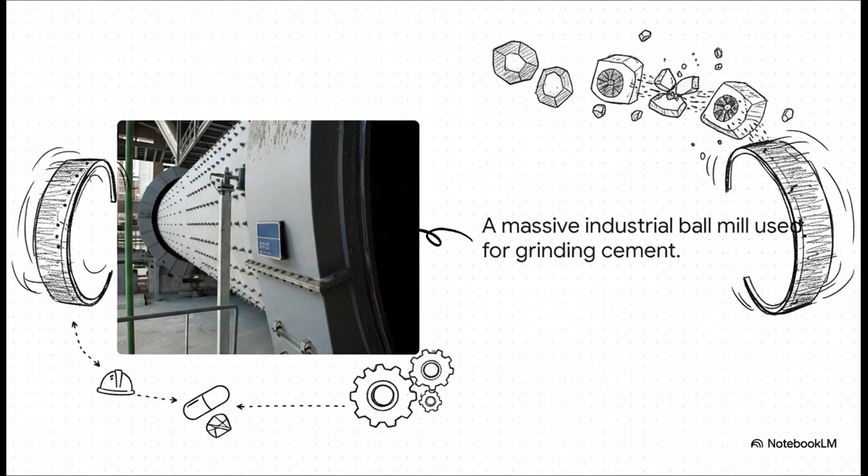I mean, just look at the size of this thing. These huge, rotating drums are the absolute workhorses of so many industries, from mining all the way to pharmaceuticals. At the end of the day, they're basically giant high-tech grinders. So what exactly is going on in there? Let's dive in and find out how this machine, which looks pretty simple on the outside, is actually a cornerstone of industry. It's capable of everything from just crushing rock to literally crafting the building blocks of nanotechnology.

To really get what a ball mill is all about, we gotta look past that massive steel shell and see the pretty elegant physics at play inside. It's this amazing mix of raw power and really precise science. At its heart, the idea is incredibly simple. You take a big drum, you put your material inside with a bunch of heavy balls made of steel or ceramic, and then you spin it.

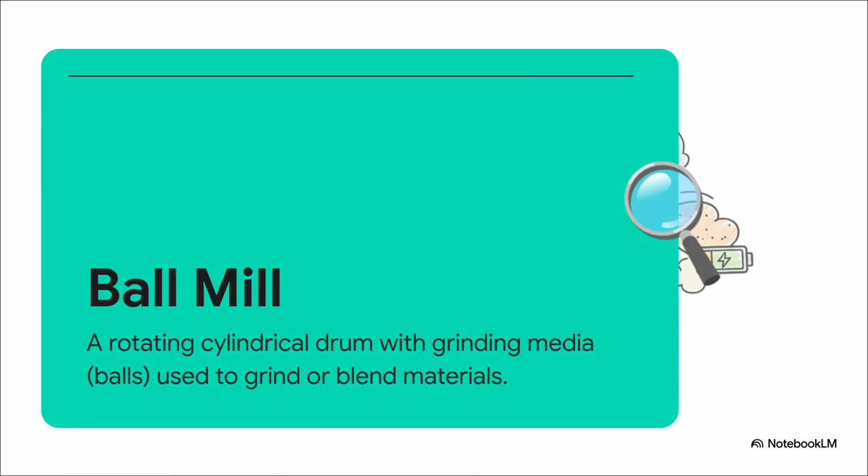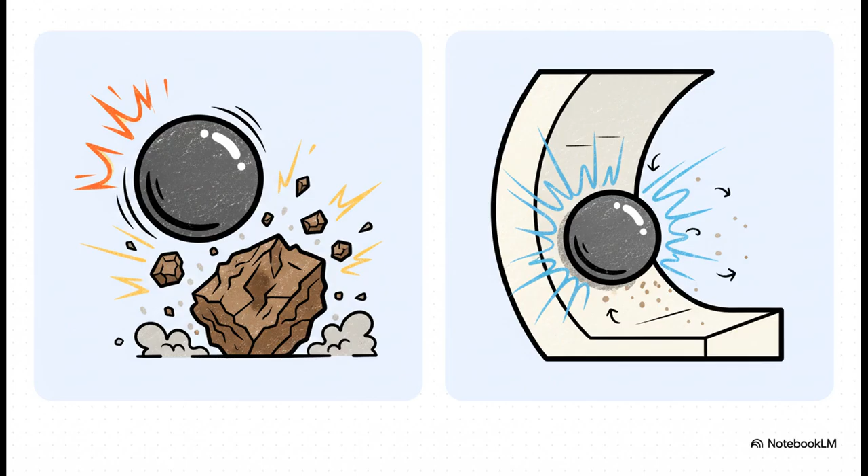But the real magic is how that spinning action actually breaks stuff down, and it all comes down to two key forces. So on one hand, you've got impact. That's just the raw, crushing force of these heavy balls falling and smashing into the material. But on the other hand, you have attrition. This is more of a grinding, shearing force. It happens as the balls and the material all rub against each other and the wall of the mill. The genius of the whole system is being able to control which one of those forces is doing the most work.

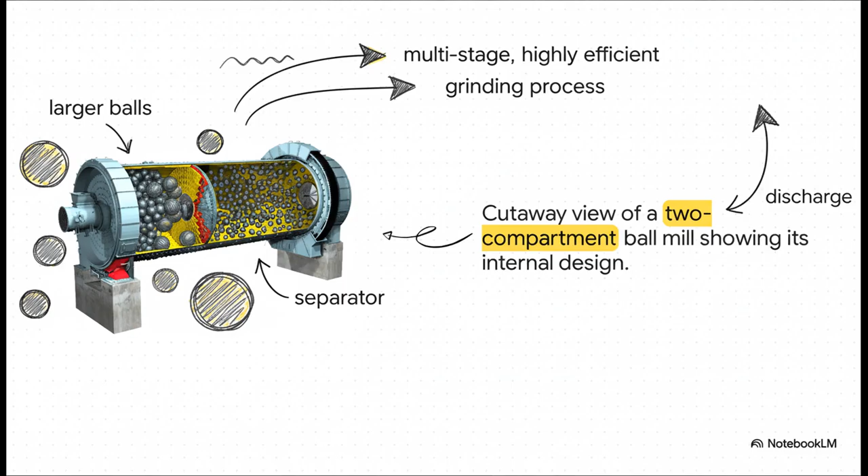And check this out. This cutaway shows you that it's not just one big empty can. These industrial mills are often split into different compartments. You can see the first section has these bigger balls for coarse grinding, then there's a divider, a diaphragm, and the second section has smaller balls for that super fine grinding. It's such a clever design. You get a multi-stage, super efficient process all happening inside one single machine.

Okay, so how do you control whether you're smashing or grinding? Well, the single most important variable by a long shot is speed, the speed of rotation. And this is where the simple machine becomes a really precise science. First, we've got to talk about a really key concept, critical speed. See, if you spin the mill way too fast, centrifugal force just takes over. It pins the balls and the material right to the wall, kind of like your clothes in a spin cycle. And when that happens, nothing gets ground. So running at critical speed is totally useless, but running relative to it, that is everything.

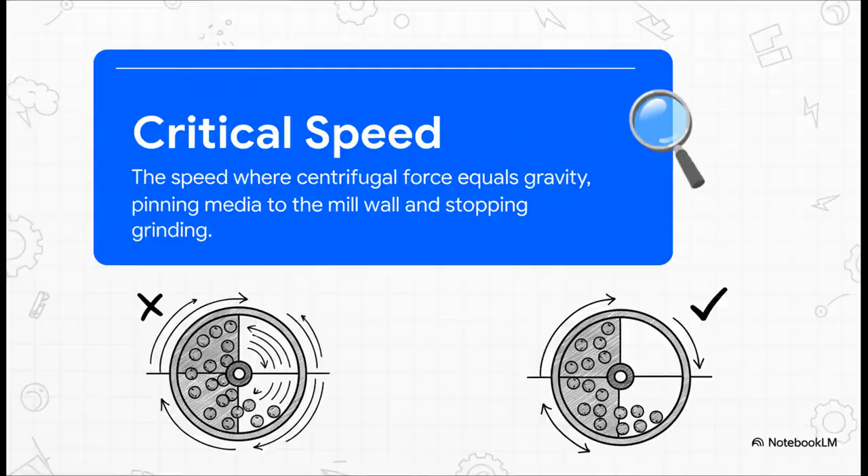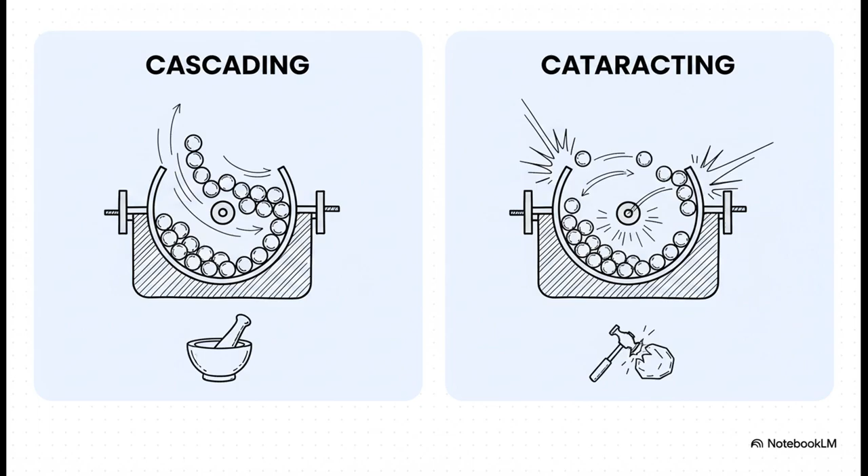And this is where it gets really cool. This shows the two main ways it works, and it's all about speed. At lower speeds, you get what's called a cascading action. The balls just kind of tumble gently over one another, creating all that friction and shear we talked about. Perfect for fine grinding. It's kind of like using a mortar and pestle. But if you crank up the speed, you get cataracting. Now the balls are actually being thrown up into the air and then crashing down, creating these huge high-energy impacts. That's more like breaking rocks with a hammer.

So that's the big takeaway, right? It's not just about spinning faster for the sake of it. It's about using speed to precisely control the type of force you're applying. And that control is what turns this thing from just a simple crusher into a genuine precision instrument. But hold on, speed is just one piece of the puzzle. To really master this whole process, especially when you're trying to create some super advanced materials, engineers have a whole dashboard of other dials they can turn.

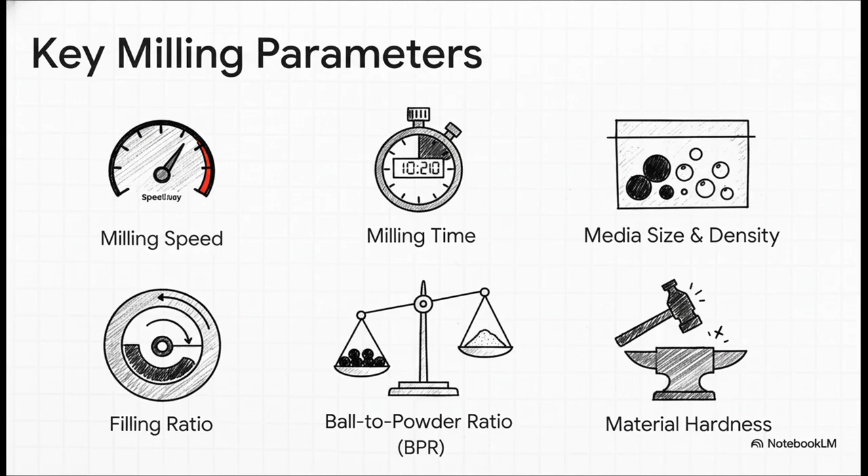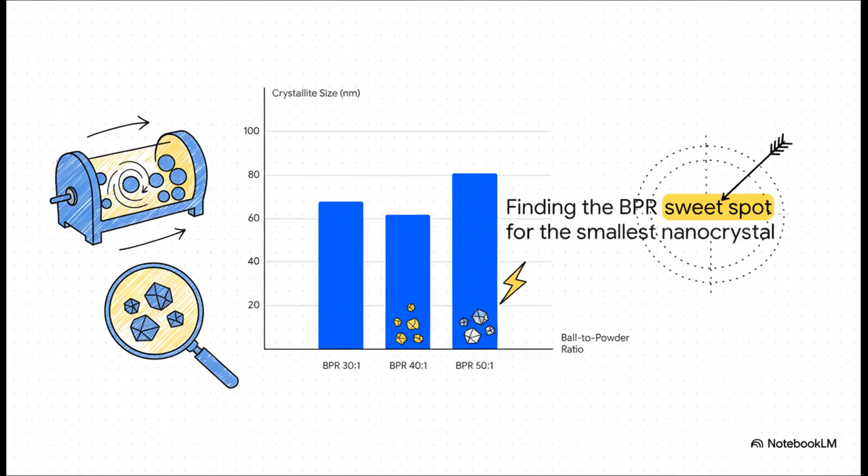So researchers were trying to shrink a material's crystallite size. That's the size of the tiny crystal structures inside the powder. They tested different ball-to-powder ratios, and look what happened. A ratio of 40:1 gave them the smallest crystal size. But when they went higher, to 50:1, the result actually got worse. They found the sweet spot.

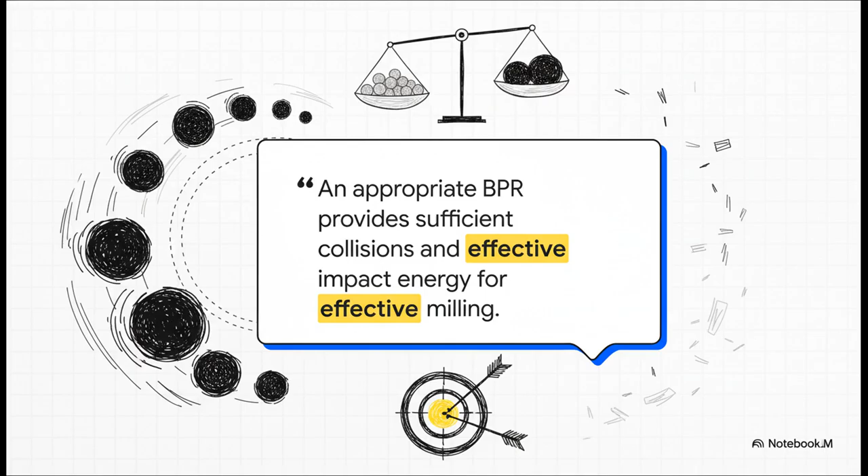And that's the whole game, really. It's all about finding the right balance. If your ratio is too low, you just don't get enough collisions to do the job. But as this quote points out, if you go too high, you create another problem. You can actually end up cushioning the impacts, or the balls just don't have enough room to move and build up energy. It's all about hitting that perfect ratio for maximum efficiency.

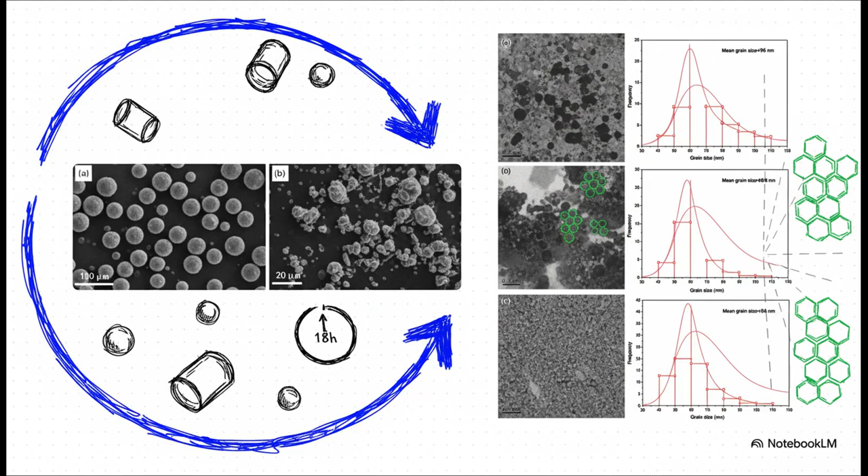The final grain size they achieved was just 60 to 80 nanometers. Now, to put that into perspective for you, that is over 1,000 times smaller than the width of a single human hair. That's an absolutely mind-boggling transformation, and it's all driven by controlled mechanical force.

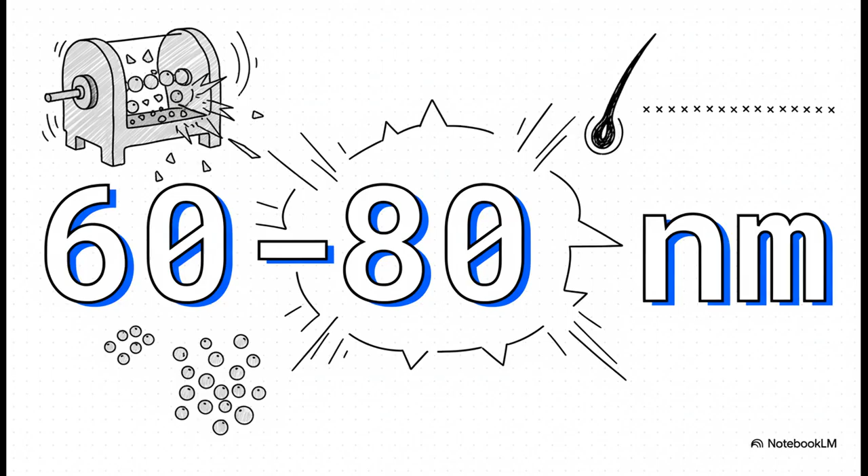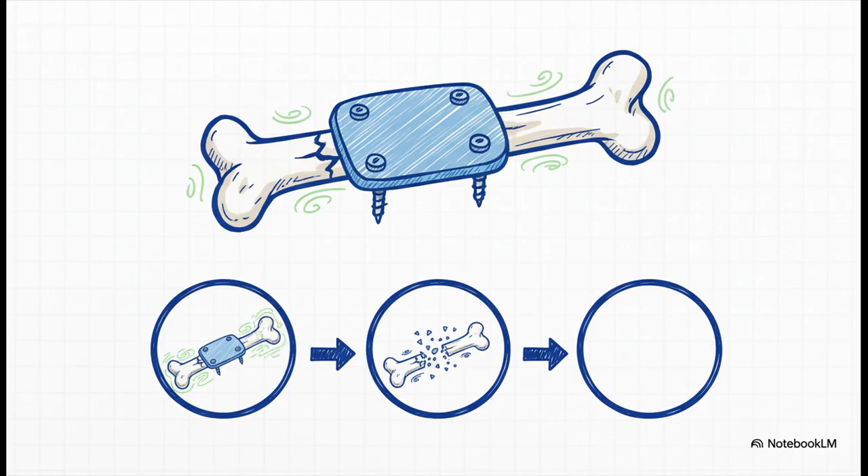So, you might be asking, why go to all this trouble? Well, because when you create materials with a structure like this at the nanoscale, you unlock incredible new properties. These specific powders, for example, are being developed for biodegradable medical implants. We're talking screws or plates that can hold a bone together while it heals and then just safely dissolve into the body. No need for a second surgery to remove them. How cool is that?

Okay, so this all sounds amazing, right? But as powerful as this technique is, that brute force nature, it isn't without its downsides. There are some real inherent trade-offs that come with the territory. For starters, all that constant impact and grinding wears down the media, the balls themselves, and that can actually contaminate your final product. The intense energy can also damage the material structure, a process called amorphization, where it loses its perfect crystal order. You can also get particles that cold weld themselves together, or just end up with a wide variety of particle sizes instead of a uniform result.

And of course, spinning these giant, heavy drums, well, that takes a ton of energy. So it really boils down to this. The core trade-off with ball milling is that you're sacrificing a certain amount of precision and purity in exchange for incredible power, versatility, and pretty low costs. It's a fantastic, powerful tool, but you always have to be aware of its limits.

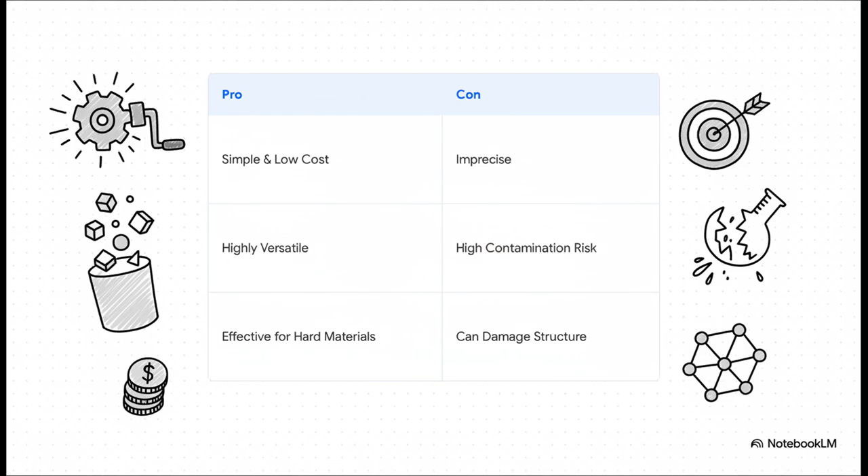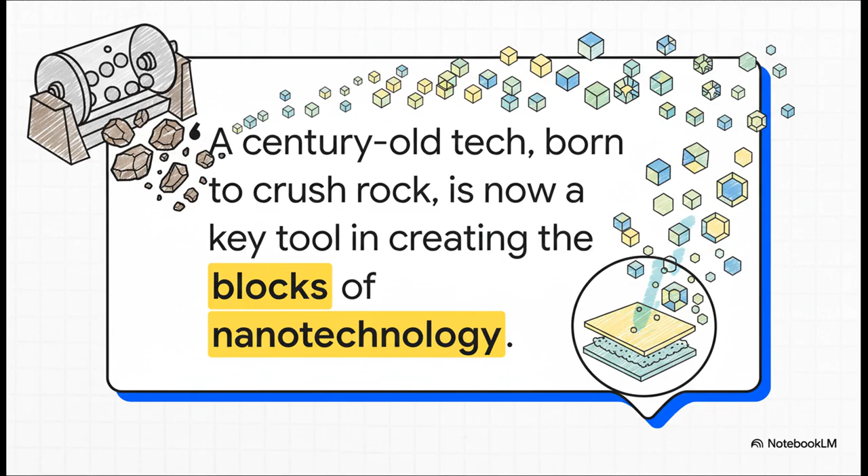Which really brings us full circle, doesn't it? This technology, which is more than 100 years old, was born from this very basic need to just crush rocks to make cement. And yet today, because we now understand the physics behind it so well, it's become this absolutely essential tool on the cutting edge of science, creating the literal building blocks for nanotechnology.

And that kind of leaves us with a fascinating thought. In our modern age of super delicate, high-precision technology, one of our best methods for building the future is still, at its very heart, a really, really smart way of just smashing things together. Maybe sometimes the most elegant solution really is just brute force, applied perfectly.